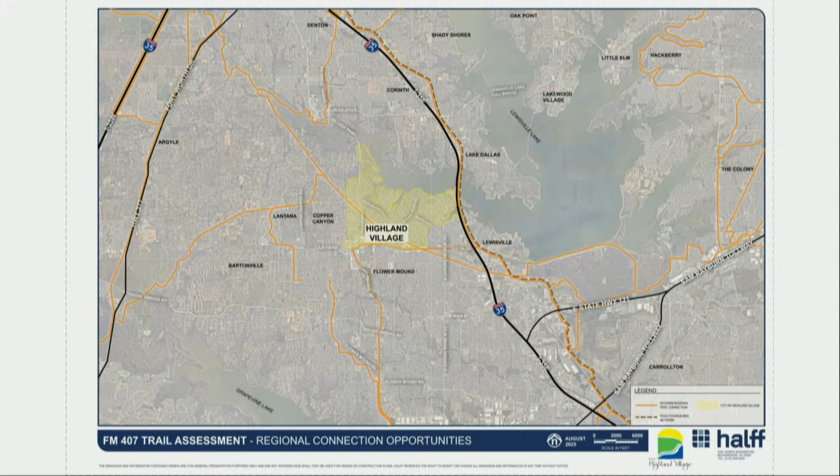And these maps are not set in stone. They're regional, and they're suggestions for the communities that they can or can't adopt. So as a city, we make them our own, but the COG is an idea. It's not, you have to do this, so just keep that in mind. Right, and you can recommend revisions; anything that the city or town would need to change to these maps can certainly be brought to NCTCOG, as Ms. Hurst mentioned. So definitely not set in stone, but it goes a long way with initial grant pre-positioning and items of that nature. Any other questions before I move on to the next one?

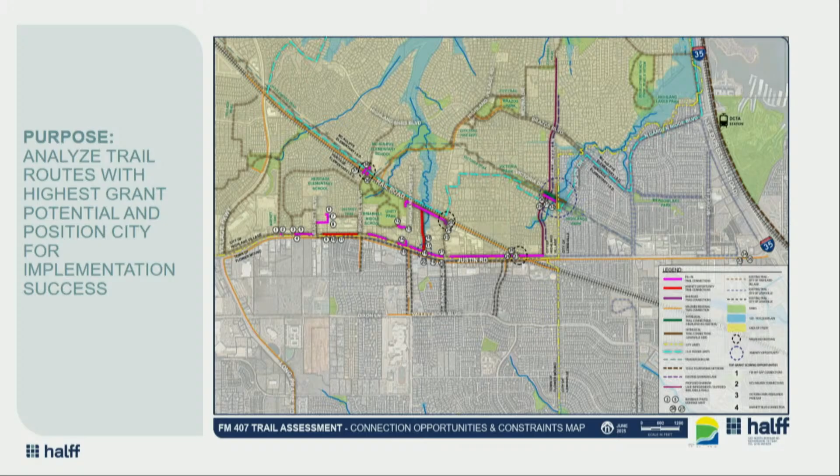Okay, perfect. All right, so what we've done to date, we provided a connections, opportunities, and constraints map. This was brought to the board and the Parks Board at the August 4th, 2025 meeting, so it has been some time. But our intent with this initial map was really to analyze multiple trail routes, not just the 3 that we have shown today, but roughly 8 total trail routes that we explored. We wanted to get some site investigation and some thoughts in terms of whether these trails would be at all potential for grant funding. So that's the initial map that we provided, and this was the final deliverable of that map.

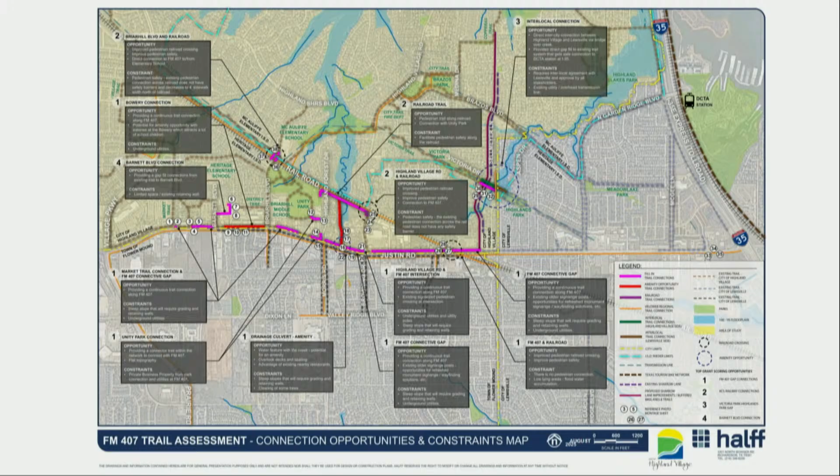So as you can see, multiple regions and areas and routes throughout the city, addressing amenities, addressing the NCTCOG VeloWeb, addressing potential trail connections to interlocal facilities in Lewisville and Flower Mound, things of that nature. So this is what was presented then. And from this information, we narrowed down the further analysis and the schematic phase that we are now in to the FM 407 trail route, and then the railroad or Trails on Rails program route that connected not only within the NCTCOG VeloWeb, but also to Unity Park. So those are the 2 main options that we're going to go over, with the FM 407 option having 2 sub options within those.

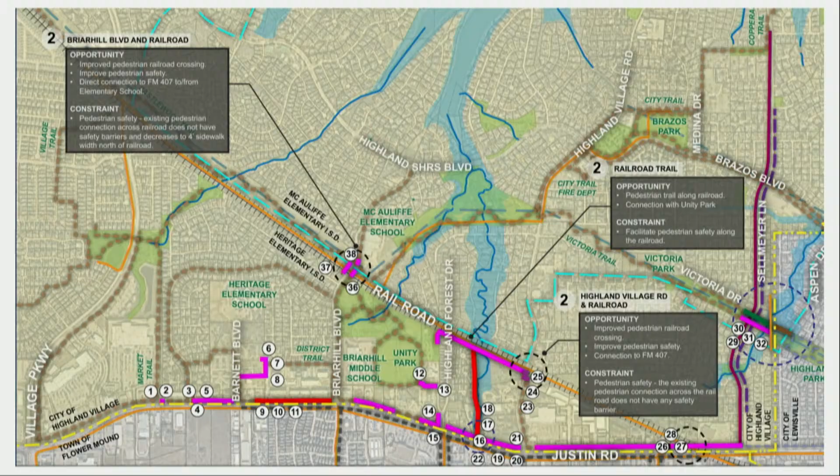All right, so getting into the alignment alternatives analysis. As briefly discussed by Phil at the beginning here, we have option 1, which is our sidewalk gap connections. The limit is Market Trail to Highland Village Road. This fills existing sidewalk gaps with a 6-foot wide sidewalk to provide full connectivity of sidewalk facilities from Market Trail to Highland Village Road. This amounts to roughly 3,700 linear feet of pedestrian improvements.

The conceptual opinion of probable costs, and we wanted to show a cost that if you went after grant funding and were awarded grant funding, this would be the cost in a fiscal year 2029 or 2030 TxDOT or NCTCOG funding range. So that came to $1,775,000. And then for turnkey design, survey, construction phase costs, basically from all of your field work to construction closeout, that comes in at $425,000.

What percentage is that? That seems high. It is high. That is mainly due to the NEPA implications and then the H&H requirements. If you do get TxDOT funding on a project, they will require you to go through a NEPA process for environmental assessment, and then they'll also have you verify your hydraulics and hydrological analysis for any impacts there.

So anytime anybody improves anything on 407, it's because it's a TxDOT grant? Correct, yes. If it's a TxDOT grant that has an advanced funding agreement attached to TxDOT and has that federal funding, they will require that full NEPA process, yes, ma'am. That's 25%. Yes, ma'am. So that is for full turnkey with inflation for when the design were to kick off for this project.

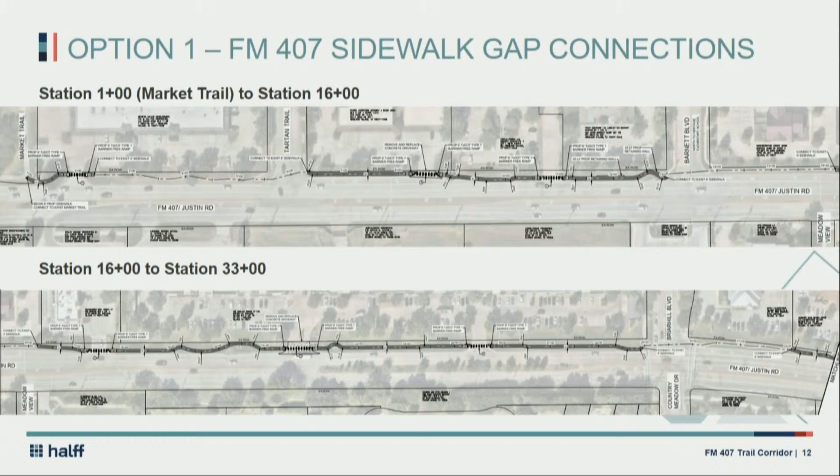From there, we have a small gap that goes to our Whataburger entrance, where we'll have sidewalk connection from there all through the Bowery District there up until Briarhill. There is a small connection that goes from Briarhill east that we then connect up to heading around Station 33 there. And that will then continue all the way up to Station, looks like 42 there.

We have a driveway crossing that does not have sidewalk currently. And then there's an existing sidewalk that exists from there up to Highland Forest Drive. From there, all brand new sidewalk going from Highland Forest Drive up to Highland Village Road. So that is option 1.

7 Mile, sorry, can you go back? Yes. 7 Mile Cafe. If you can see where the asphalt parking lot is right there, it's right at that corner, and then we have that kind of small stream or tributary just to the southwest there. That really is the most challenging, I think.

Yes, and you can kind of see throughout, we do make a couple sort of jostling bends and turns. That's really to get around as much of the existing utility infrastructure that's there and not have to do any relocations. I'll get into that with the next slide, but our intent with this one is really just to minimize our utility relocation and franchise utility relocation to adjustments, above ground appurtenance, adjustments to grade, things like that, not have any major line relocations.

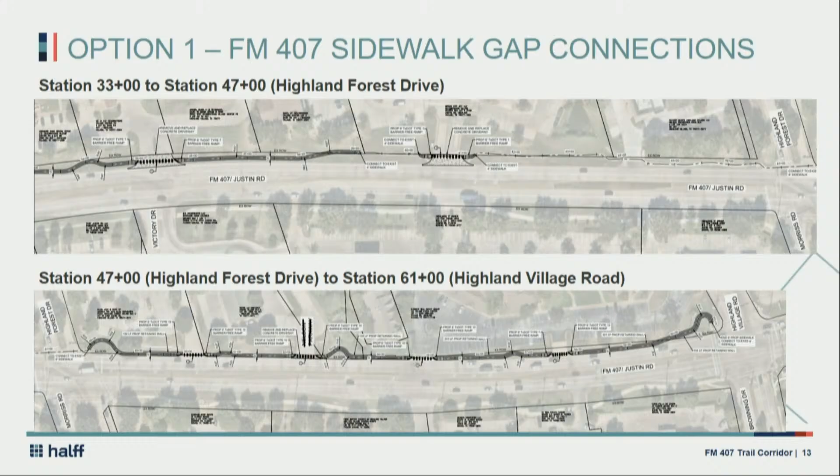So kind of getting into some of the summary and superlatives of this option. This achieves our continuous pedestrian connectivity within the corridor and the limits. It's not intended for bicycle traffic. It would be just a pedestrian use in this case. This option does have minimal easement acquisition requirements, corner clip takings on commercial property at intersections, things like that. We would be looking to locate the sidewalk as much within existing TxDOT right-of-way as possible.

Yes, ma'am. When you're looking at these, have you done a pedestrian impact analysis on what the actual use will be? We have not, in terms of getting pedestrian counts of usage. Most of what this alignment is based off of is the public input and from our previous meetings with the board last August, and then from city staff. Oh, I totally get it.

Being that we had a $2 million budget deficit last year, it would be helpful to know, and I know a lot of cities are starting to require pedestrian impact analysis for proposed developments, and there's formulas to do it, to see exactly what we're talking about. Is it 50 people? Is it 1,000 people? Just to know, because the people using this are going to not be Highland Village residents. Some will, but mostly will be from other places. So it'd be just nice to know what the volume is.

Sure, sure. And I think with our next phase, if that's something that's requested by the city, we can provide that before we move forward with a full-scale design. That's certainly something we can provide. So, okay, perfect. And then alignment avoids, as I mentioned, franchise utility relocations. Like I said, anticipating minor adjustments. This alignment has very minimal structural and drainage improvement implications. And as noted from the previous slides, this option 1 is least expensive.

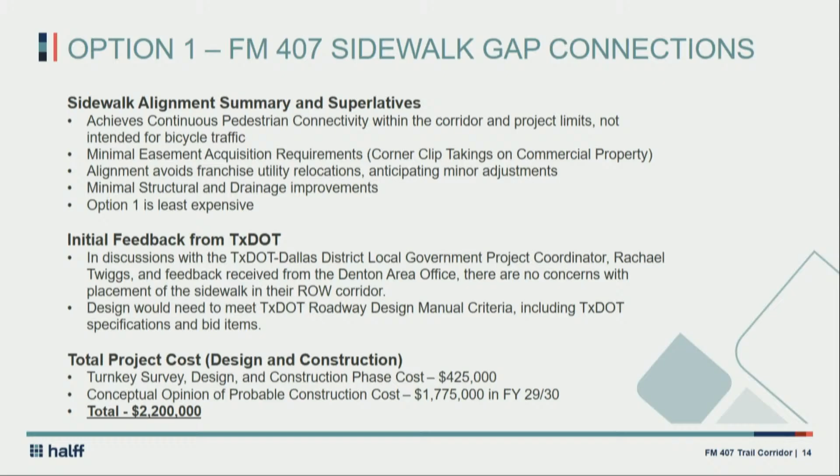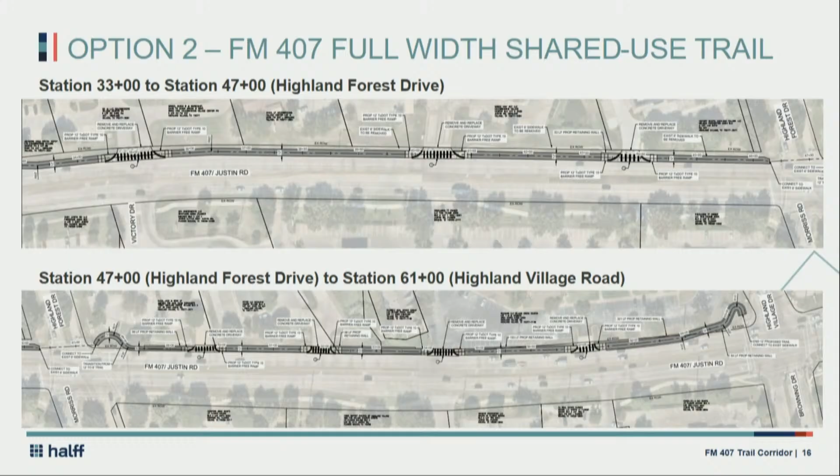Yes, sir. How are you all handling the access ramps along here? They're not all 12 feet wide, obviously. Right, and so what that's going to require is some driveway improvements. So in order to get our trail to connect and then provide for ADA access across those driveways, because like you said, right now they do have little stub outs and kind of gaps there to install a ramp, but with our 12-foot wide, we'll have to do some driveway improvements to get that all to be 2% and grade.

Does that affect the classification of the trail if it's 12 foot and then it tapers down to like 5 foot? So we wouldn't be tapering them down at the driveways. We would maintain the 12 foot through the driveway section. Can you go back one slide then? I think it's the Briarhill section. So that is the section where for driveways we're maintaining 12 foot.

If we have existing intersection infrastructure or crossings, in order to get our trail in without impacting traffic signals, existing crossings, coordination with TxDOT and Flower Mound, that's why we've necked those down there to utilize as much of the crossing infrastructure as we can. If that's something that we need to explore to provide for those full 12-foot crossings at the lights, that's something we can.

Similar to Barnett, right, as well? Yes, same situation there. Now that one is a 12-foot crossing. East side? Barnett. Top right. Yes, Barnett, right. We have a 12-foot crossing right there, yes, sir. But the ramp itself is not 12. So the ramp has an opening of 12 foot. Going north, it does neck down to existing there. Okay. Thank you.

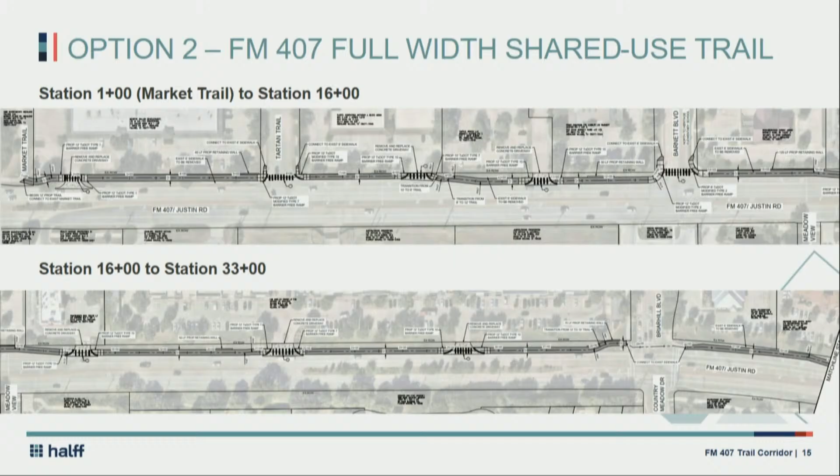All right. Getting into the summary and superlatives for this option, so this does achieve a new continuous shared use path, like I said, for pedestrian and bicycle usage. Great scorecard from a NCTCOG and TxDOT grant perspective, especially with the multi-use function. And then moderate easement acquisition requirements. There are going to be strip takings in this application for this trail because of the width, and then obviously some corner clippings at our intersections where we're going to have that larger width connecting to existing sidewalks.

Yes, sir. Sorry to interrupt. Strip takings. Are we eminent domaining that? So with this, it would be easement. We're not trying to take for right-of-way or that possession, essentially. This would be voluntary though, right? The landowner would have to grant us an easement. Yes, exactly. Okay, so is the estimate accounting for any monetary? Yes, the 3.8 million does account for a conservative amount of square footage that would be needed at each property. Okay. Not giving them any ideas, but. Sure, okay.

How does this work in conjunction with the easement? Are they going to allow it? So this one, and I wonder if maybe we're talking about option 3 on that one. There is a water district easement running along the railroad corridor. No, there's a giant one running along 407. Okay, is it in their own easement or is it in TxDOT right of way? It's right up against the right of way. So you're going to have to deal with Upper Trinity. Yeah, so that coordination will be something that we'll have to do on that piece.

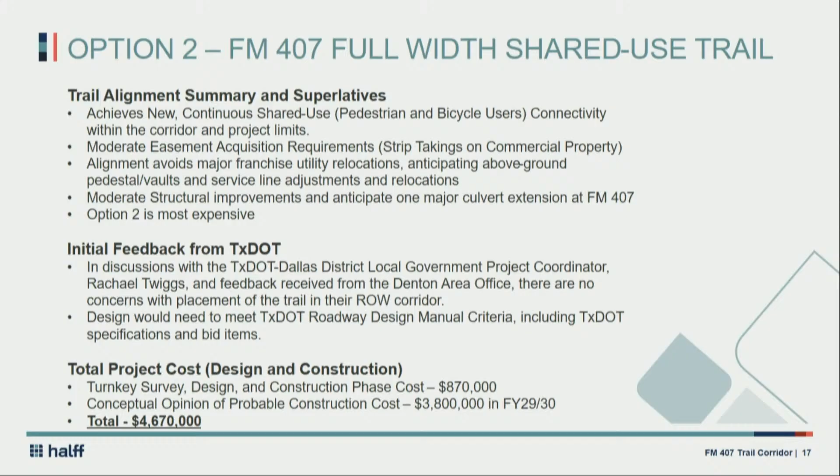And then one thing we did want to discuss briefly is the implication of an 8-foot trail if we implemented that, and what the impacts and costs are there, pros and cons. So an 8-foot trail is considered allowable from AASHTO and from TxDOT, but is considered an absolute minimum for shared use paths. So you really need a hard amount of evidence to make a case for an 8-foot trail being installed. They don't usually like those on large amounts of trail.

It can be in pinch points in areas where there's an absolute need, if there's clearance issues, if there's a major utility that would have to be relocated if you put in a 12-foot, things like that. But you really just need a basis if you're going to go with that option. Okay. I just want a little bit of clarification there. You said they don't like an 8-foot trail. Who is they? TxDOT, so that would be on the grant funding side. So TxDOT and NCTCOG.

Okay. And so if you were to approach them for grants with an 8-foot trail option, the likelihood of an award of a grant for an 8-foot trail is very, very low. But it's a higher probability if you do a 12-foot. Yes. Why is that? Because they like to see the full connectivity and the full width for a shared use path for the trails that they're currently funding. So everybody can ride a bike, walk their kids, and have strollers at the same time. And golf carts. Yeah.

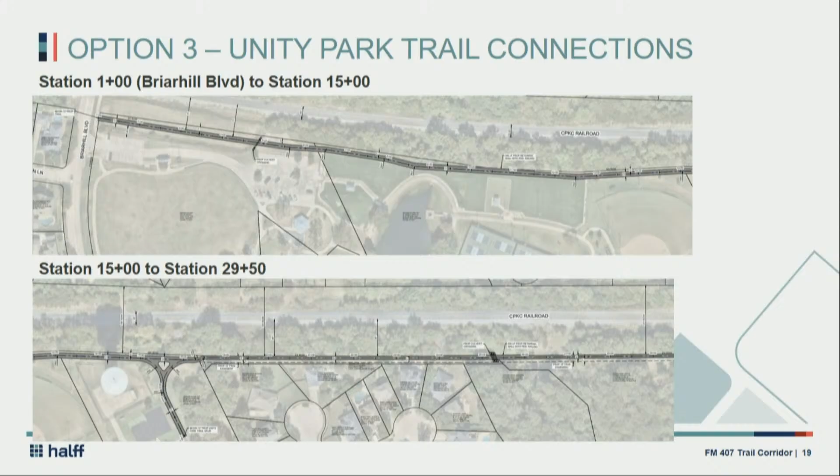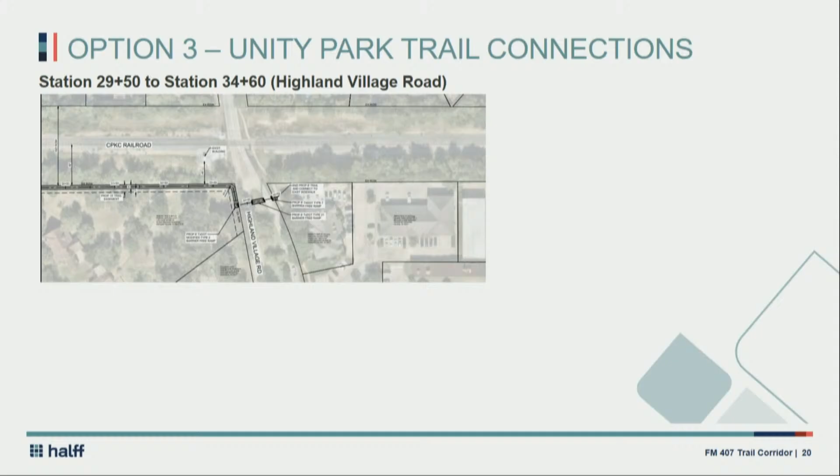And then finally, exiting the easement, crossing Highland Village Road to connect to the existing pedestrian facilities on the east side of Highland Village Road. So summary and superlatives for this option: it does achieve new continuous shared use pedestrian and bicycle user connectivity between the two roadways and Unity Park. There is approximately 24,000 square feet of easement acquisition anticipated. That assumes our 15-foot trail easement taking on Highland Forest HOA and one residential property, the larger property there just west of Highland Village Road.

Utility coordination with UTRWD with their water line, though avoiding relocations. They have a very, very deep transmission line through that corridor, so we do not anticipate any relocations of the line itself. It would be any above-ground appurtenances that exist within their corridor. And then moderate structural improvements and 2 minor culvert crossings to get the drainage to convey.

Option 3 saves pedestrian and bike users going to Unity Park from the east of Highland Village Road up to 1 mile of travel distance. So instead of having to go north, head through the trail system in that area and then head back down south on Briarhill, it's a quick connection going through this area to get to Unity Park. So it saves a decent amount of distance and time for those users. And our residents would actually be the ones using this. Correct.

All right, and then to the point on the CPKC railroad right-of-way, so what we showed y'all back in August showed utilization of the railroad right-of-way for this corridor. We had an original alignment that proposed the entirety of it being within the CPKC right-of-way through a Trails on Rails program in that sort of grant program that's available.

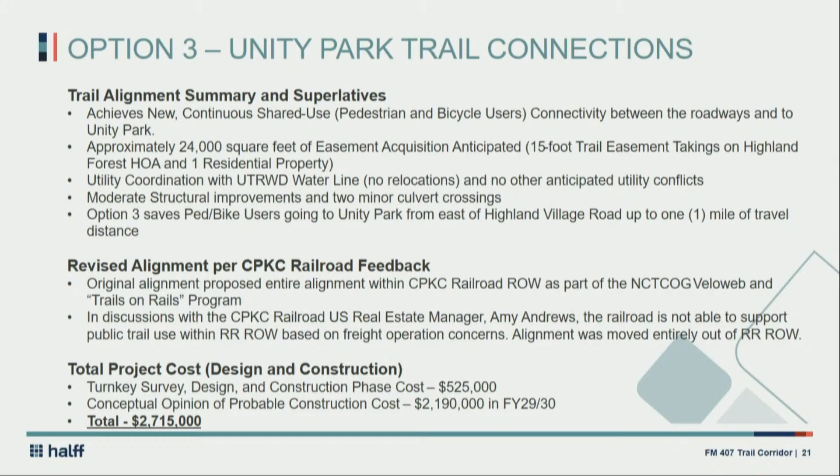All right, so I'm going to pass it off to Liz to go over grant opportunity assessment, and she'll kind of discuss some of the programs and features to that. So thank you, Liz. Thank you. Okay.

Thanks, Kevin. So I'm going to talk about the grant implications of each of the alignments. Put my glasses on so I can see.

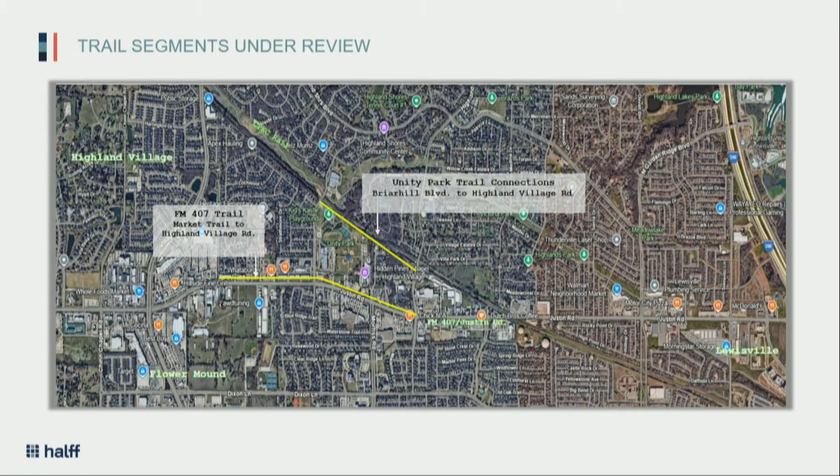So my job is really to look at this for federal and grant funding and just to provide as much information as possible so you guys could make informed decisions about how you want to use your local dollars and time. Kevin already went through the costs for each one of the alignments, so I'm going to skip through this. I have another slide where I'm going to talk about the implications of local funding, if you want to use federal funding or not. So I'm going to move past this one and give you some updates since the last time we met. So since we last met with you, we took the projects to NCTCOG to talk about what their feelings were about the projects that we listed.

After that meeting, the NCTCOG suggested that there might be another funding option outside of 2 grants that we had identified for these projects. So we had identified the transportation alternative grants from both NCTCOG and TxDOT. Those are still really good options. There is another funding program through NCTCOG that is from the same bucket of money at the feds, but it comes down in a different way. It's called their transportation funding program.

That program, they are grant dollars, but there's a different way to go about getting it. It's more low-hanging fruit, it's less competitive, it's more collaborative. They work with you every step of the way, and generally those funds are reserved for roadway projects, which is why we didn't ID it up front for these projects. When we met with them, they said because of the implications of these alignments both being on the VeloWeb, so the regional trail network, and the implications of safety, taking people off roadways to walk to get to destinations, they could fit these under 2 different types of funding options from this transportation funding program.

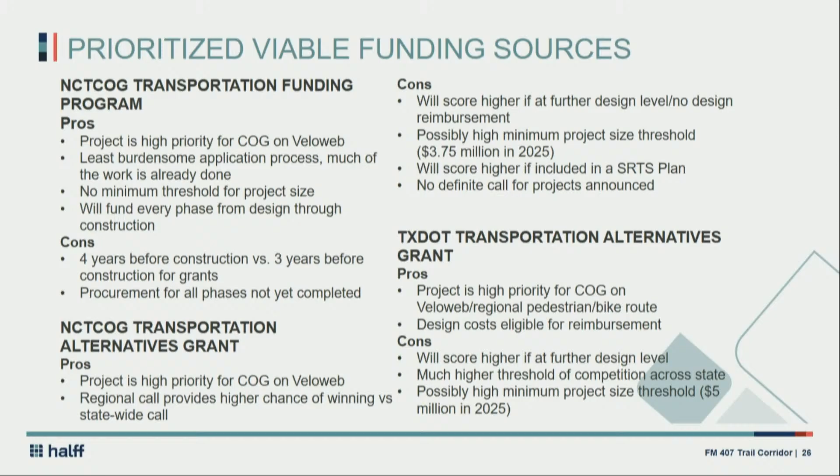Okay, so I'm going to move on to the next piece. What I just spoke about, federalizing the project as some folks call it, expect anything with federal funds to have a longer time to get to construction. Sometimes that means more costs, right? Like you saw these inflated costs for turnkey engineering and design, that's because it's with federal funding. So those costs would be lower if you're not getting a project federally funded.

You're gonna pay more to get a federally funded project up front with design, and your overall project is gonna cost more. But y'all will have to decide if it's worth it, the return on investment, to get a few million dollars of construction and design covered, even though it inflates your costs a little bit. And we have a table that speaks to that in just a few slides. We already talked about NEPA, and TxDOT would have to review all design milestones, whether it comes through the COG or not. They partner with whoever is going to run the program. All of these funds would require 20% non-federal match.

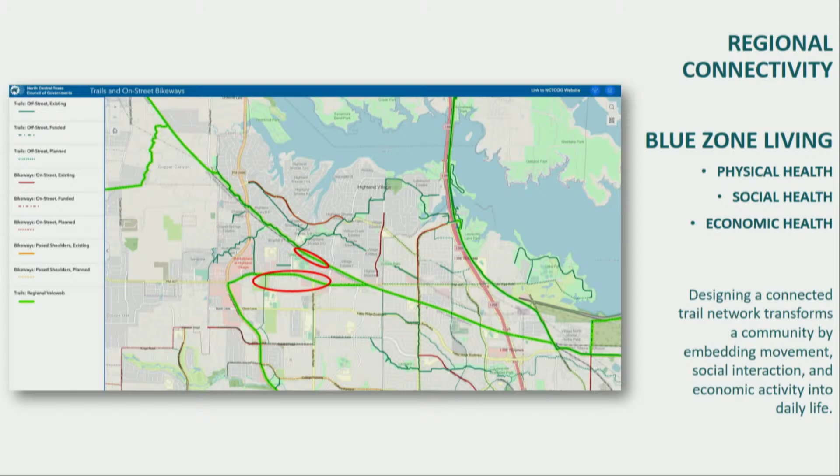Okay. So again, going back to where we started and looking at these alignments, both of the sections, near the rail and on FM 407, have great grant implications for regional connectivity. They both support this idea of blue zone living, which is using mobility and walking paths, pedestrian access to improve health benefits: physical health, social health, getting out and walking with your kids to school, seeing other parents, and economic health, getting more folks walking to your businesses. So they all start with a good story. You've got a good story there. They're not the only good stories in Highland Village, but these specifically are the ones we looked at, and they have great benefits to them.

The reason we think the FM 407 full shared use path, the 12-foot path, is going to be the most grant-ready or most competitive project for federal funds is just as I mentioned before. There are a number of reachable destinations. Whenever you put this into a funding program, it's not exactly a point per destination, but it's almost like that. So the more destinations you're reaching, the higher you're going to score. FM 407 is the only place out of any we looked at that has actual accidents with pedestrians recorded on the TxDOT mapping system.

What that means is that by implementing a full 12-foot SUP, just as you stated, it brings everybody off of the road. So you have bikes, walkers, wheelchairs, rollers. You're pulling everyone off of the motor vehicle traffic, and that is a high safety implication on a really busy thoroughfare that has seen accidents. So that also pushes it up in federal funding past the railroad alignment. And then the other piece is that it had its own plan in your comp plan. You had a very specific plan for the FM 407 corridor, and that also makes it very attractive for federal funding.

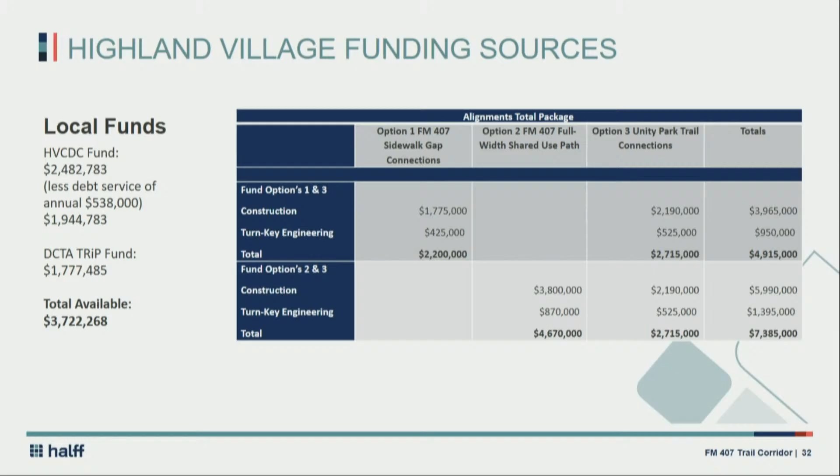What we see is if you wanted to fund both of these projects locally, both of these alignments, you would either do option 1 for the sidewalk gaps on FM 407 and the railroad trail, or you would do the full SUP on FM 407 and the railroad trail. So we have the options there of what the local dollar amount would be if you chose those 2 options together to get both things funded in your community locally. This is what it would look like.

If you went to get federal funding for option 2, the FM 407 full shared use path, you could ask for this $3.7 million for construction and design. So the TxDOT or the Transportation Funding Program would fund design and construction. Your local match then would be $934,000. So if you just wanted to do that one trail, that's what your local cost would be, $934,000. If you wanted to do both and fund the other one locally, then your local cost would be $3.6 million and a federal total investment of $3.7 million.

If you went to the NCTCOG Transportation Alternatives Program, you would also have to pay for engineering. So that's an added cost. That bottom table shows that added cost of $870,000 if you went into that application. So your local total investment goes up to $4.3 million if you want both alignments funded, and a federal total investment of $3 million. So this is just so you can see how it plays out with the fund numbers that we've been given, just looking at the information we have.

Would this require to pass any more bonds? Phil? I don't think I know the answer to that. Would we have to pass any more bonds to fund any of this? No. If you were able to use TRIP funds and fund balance, you would not. So the 4 million, we could figure it out? Yeah, you wouldn't want to issue any other bonds.